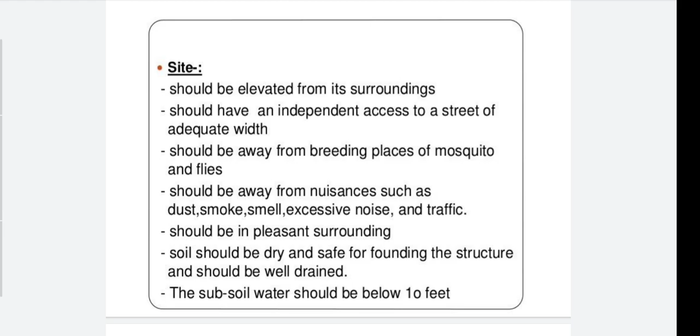Soil should be dry and safe for founding the structure and should be well drained. Wherever the house is built, the soil should be dry enough and good drainage should be present. The subsoil water level should be below 10 feet of the house.

Setback is an open space all around the house which allows proper ventilation and lighting, the available space in and around the house.

In rural areas, it is recommended that the built-up area should not exceed 1/3 of the total area. For example, if you have 5 cents of land, the house should not exceed more than about 1.67 cents, or roughly 1/3 of the plot.

In urban areas, it is allowed up to 2/3 of the total area. This means if a person has 3 cents of land, up to 2 cents can be used to build the house, and the remaining 1 cent kept for walkway, street or similar use. The setback should be such that there is no obstruction for lighting and ventilation.

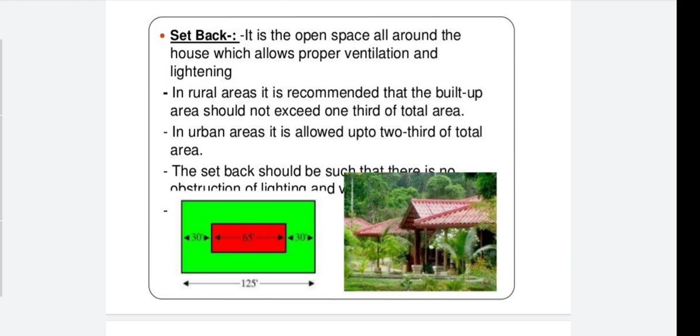Next, moving to the floor. It should be pucca and satisfy certain criteria. There are two types, kacha and pucca. Pucca means it uses modern technique and is well built, using tiles or concrete or something. There are certain criteria to build the floor also.

It should be impermeable so that it is easy to clean and dry. The water should not drain so that it can be cleaned properly. It must be smooth and free from cracks and crevices to prevent the breeding of insects and harborage of dust, so there should not be any cracks.

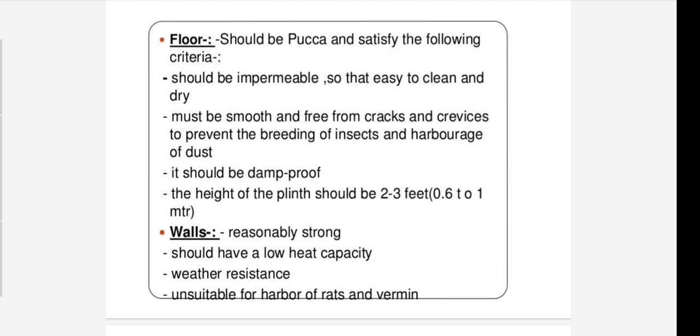It should be damp proof. The height of the plinth should be 2 to 3 feet, that is 0.6 to 1 meter. And the walls should be strong, have low heat capacity, be weather resistant, and unsuitable for harborage of rats and vermin. It should be strong enough so that no rats can burrow the walls, and there should not be any growth of insects.

The roof should not be less than 10 feet in the absence of air conditioning for comfort, and should have a low heat transmittance coefficient. Roof should not be less than 10 feet, that is 3 meters, in the absence of air conditioning. If it is an air conditioned room, up to 7 to 8 feet can be allowed, not less than that.

Rooms should not be less than 2; at least one of them can be closed for security. The other may be open on one side if that side is a private courtyard. The number should be increased according to family members. At least one room should be there for security, to sleep, and one for the living room.

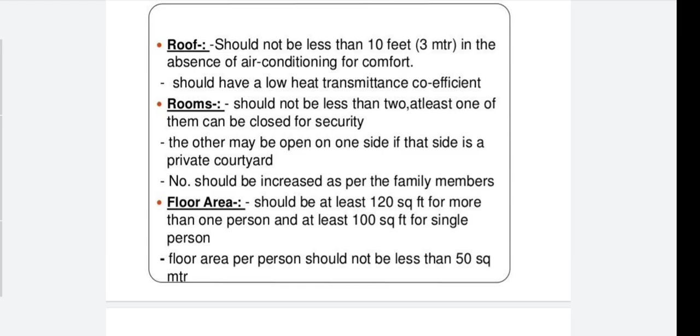Floor area should be at least 120 square feet for more than one person, and at least 100 square feet for a single person. If more people, then at least 120 square feet per person; if one single person, then 100 square feet can be allowed. Floor area per person should not be less than 50 square meters in the house.

Cubic space: at least 500 cubic feet per capita, preferably 1000 cubic feet. Cubic space means the area present in one room. It should not be less than 500 cubic feet; 1000 cubic feet is also okay, it is allowed.

Windows: every living room should be provided with at least two windows, and one of them should open directly onto an open space, directly to the outside area. The windows should be placed at a height of more than 3 feet above the ground in living rooms.

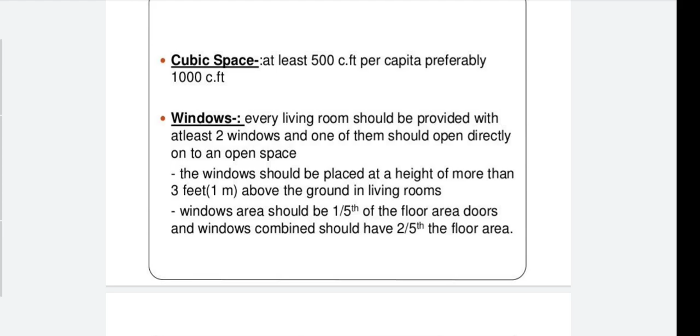Windows area should be 1/5 of the floor area, and doors and windows combined should have 2/5 of the floor area. That means for one door, 1/5 of it should be window size, and combined windows can be 2/5 of the floor area.

Lighting: the daylight factor should exceed 1% over half the floor area. Daylight should be distributed 1% over half the floor area.

Kitchen: it must have a separate kitchen, must be protected against dust and smoke, should be adequately lighted, provided with a water supply, provided with a sink for washing utensils, and fitted with arrangement for proper drainage. All these facilities should be available in the kitchen.

Privy: a sanitary privy is a must for every house, belonging exclusively to it and readily accessible. Every house should have this privy; outside use of latrine or anything should not be allowed.

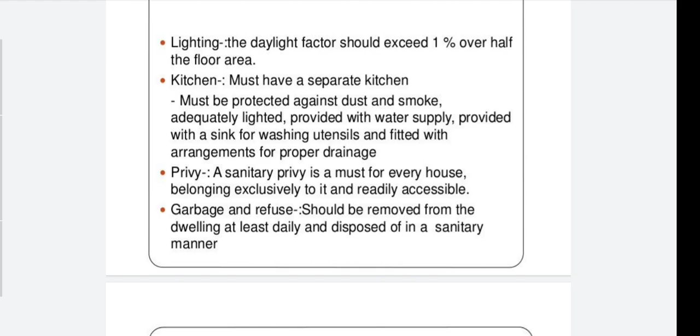Garbage and refuse should be removed from the dwelling at least daily and disposed of in a sanitary manner. Whatever waste is produced in the house should be removed within 1 day of production, and disposed of in a sanitary manner.

Bathing and washing: the house should have facility for bathing and washing belonging exclusively to it, providing proper privacy. There should be proper privacy, and one room should be there for bathing and washing.

Water supply: the house should have a safe and adequate water supply available at all times, around the clock.

In rural housing, there are minimum standards. There should be at least 2 living rooms. Ample veranda space may be provided; the veranda can also be called a courtyard. The built-up area should not exceed 1/3 of the total area.

There should be a separate kitchen with a paved sink or platform for washing utensils. You can have either a sink or some platform for washing utensils.

The house should be provided with a sanitary latrine. The window area should be at least 10% of the floor area for proper ventilation and lighting.

There should be a sanitary well or tube well within a quarter mile from the house, for water facility.

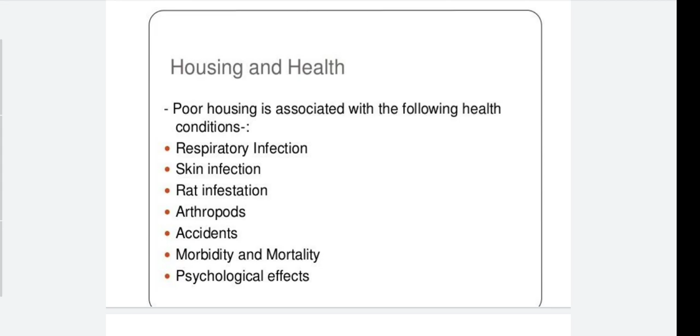Housing and health. How is housing related to health? Poor housing is associated with certain health conditions. If the house is not properly built, with no proper ventilation or water facility, that will lead to health effects like respiratory infections, skin infections, rat infestation, arthropod infections, accidents, increased morbidity and mortality rate, and psychological effects.

What is overcrowding? It refers to a situation where more people are living within a single dwelling than there is space for, so that movement is restricted, privacy is secluded, hygiene becomes impossible, and rest and sleep become difficult. Overcrowding means many people living together in an area.

A person should have at least 50 square feet of area, but when 2 to 3 people live in less than that space, it is overcrowded. Overcrowding is a health problem in human dwelling.

It may promote the spread of respiratory infections such as TB, influenza and diphtheria, and other communicable diseases also will spread.

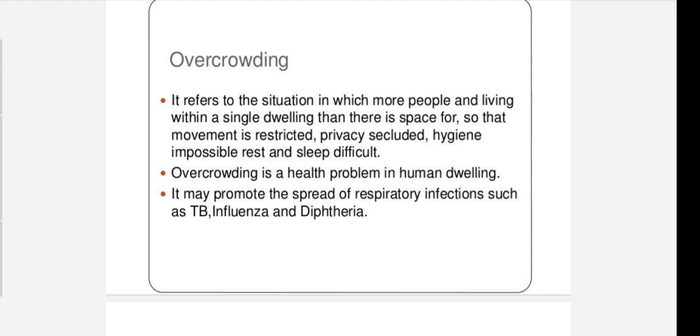There are measurements like persons per room and floor space. The degree of overcrowding can be best expressed as the number of persons per room, that is, the number of persons in the household divided by the number of rooms in the dwelling. The accepted standards are: one room for 2 persons, 2 rooms for 3, 3 rooms for 5, 4 rooms for 7, and 5 or more rooms for 10 persons.

Beyond 10, add 2 more persons for each additional room. That is the accepted standard. If more than 2 persons occupy 1 room, then it is overcrowded.

Sex separation: overcrowding is considered to exist if 2 persons over 9 years of age, not husband and wife, of opposite sexes are obliged to sleep in the same room. So if female and male who are not married live together in a room, like 2 to 3 people, this is also considered overcrowding.

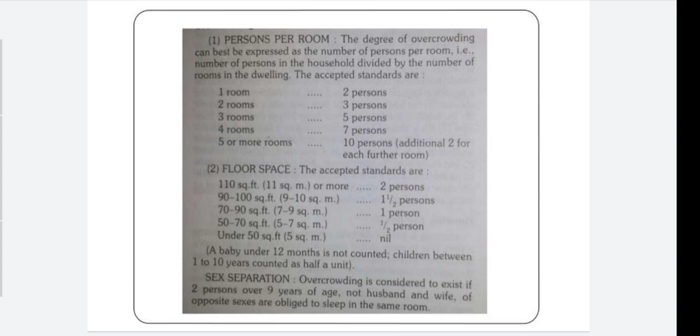What are the indicators of housing? In recent years, the use of indicators has become widespread for measuring quality of life. The indicators for housing may be classified as physical, economical and social. Physical indicators are based on floor space, cubic space, room height, person per room, rooms per dwelling, and environmental quality like air, light, water, noise, and sewage disposal - which we have already discussed.

Economic indicators include cost of building, rental levels, taxes, and expenditure on housing - all this comes under economic indicators.

And social indicators - certain factors were proposed at an inter-regional seminar on the social aspects of housing organized by the United Nations in 1975. These are as follows.

First, indicators related to prevention of illness, which comes under social indicators itself: frequency of illness due to inadequate sewage and garbage collection, frequency of illness associated with contaminated water source, and frequency of insect-borne diseases. Due to inadequate sewage and garbage collection, there will be a frequency of illness among people living in the house. Even a contaminated water source will spread infections.

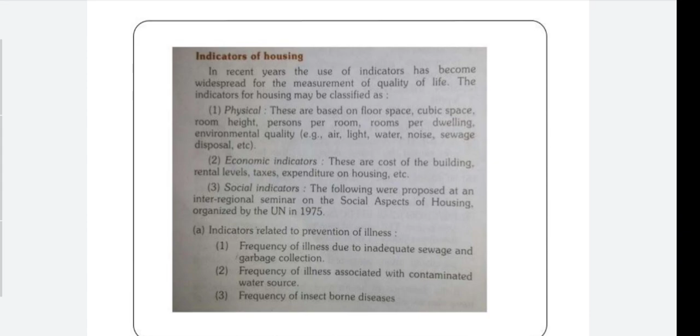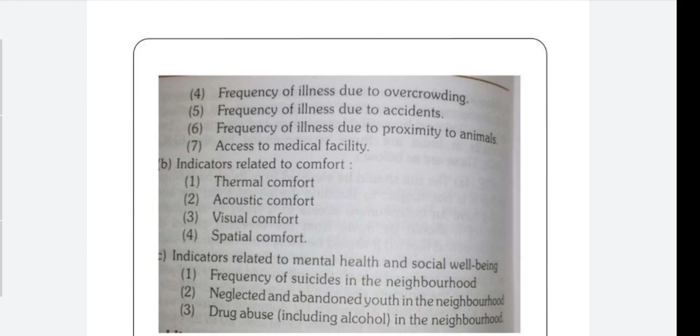Also frequency of illness due to overcrowding, frequency of illness due to accidents, frequency of illness due to proximity of animals, and access to medical facilities - these all come under indicators related to prevention of illness.

Next, B: indicators related to comfort. There is thermal comfort, meaning temperature and humidity, acoustic comfort meaning there should be no disturbing sound, visual comfort meaning good lighting, and spatial comfort meaning there should be enough room.

Indicators related to mental health and social well-being include frequency of suicides in the neighborhood, neglected and abandoned youth in the neighborhood, and drug abuse in the neighborhood - all this comes under mental health related indicators.

What are the public policies? House site and construction assistance. There is one scheme called Indira Awas Yojana, introduced in the central sector in 1985-1986 as part of the Rural Landless Employment Guarantee Program.

Under this scheme, one room and one kitchen are constructed, attached with a latrine, bathroom, and a smokeless chulha. That's all about housing - we'll see the next chapter. Thank you.